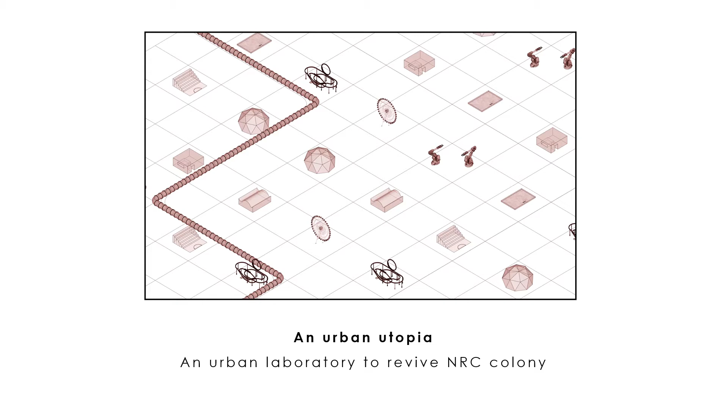The aim of my research was to explore utopian dreams that have existed in architectural movements and use it to derive a toolkit to intervene in a dystopian-like scenario.

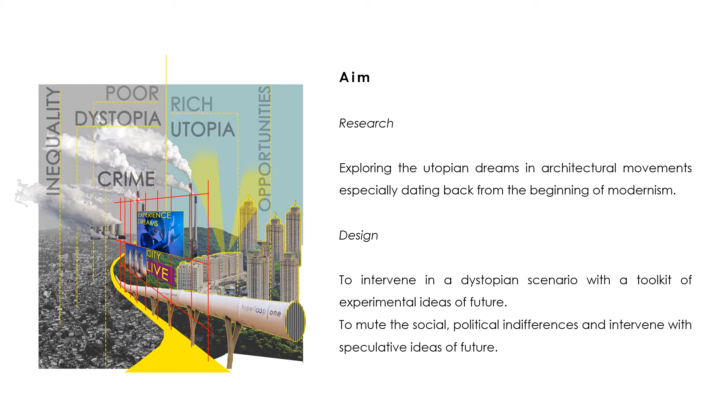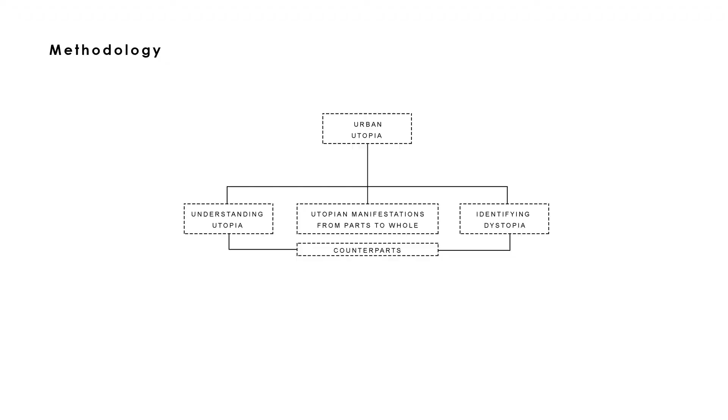The process consists of first understanding the concept of utopianism, then analyzing utopian manifestations from a part-to-whole approach, and finally understanding the counterpart of utopia, that is the concept of dystopia. By identifying experimental architecture that has redefined the way we build, and also reading narratives that speculate and shape the cities of tomorrow, I came to the following conclusions.

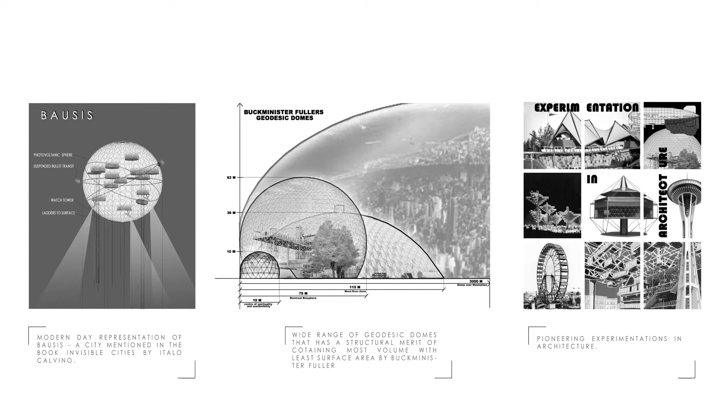Utopia cannot be used as a blueprint. Utopia cannot be achieved or designed, but it is something to be strived for. What may be utopian today may not be the same tomorrow.

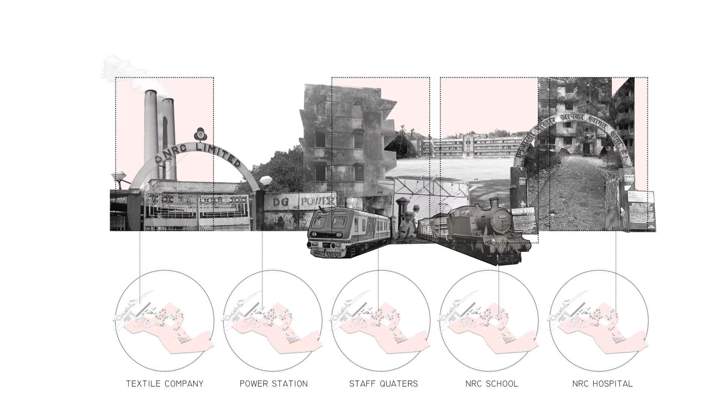To revive a city from the state of despair, it is essential to document the array of things that led to the certain disposition of the city's conditions.

The National Rayon Corporation Company, known as the NRC Company, was once a thriving township with amenities like school, hospital, clubhouse, housing and guest quarters, shopping center, recreational space, etc.

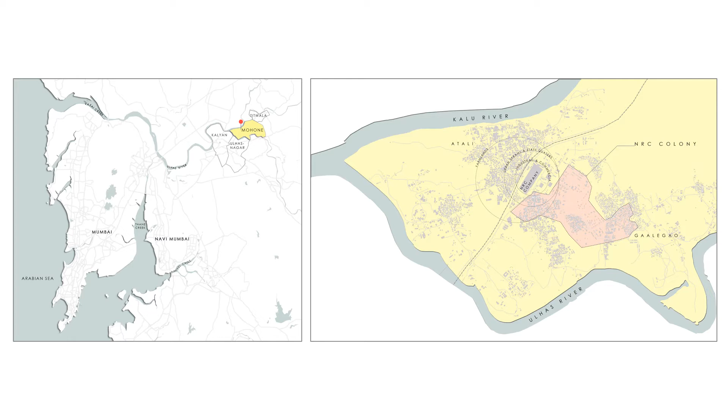A chemical and textile manufacturing unit got established in the year 1946 in the town called Mohone, also known as Ambivali, which is along the outskirts of Kalyan in Mumbai.

Such an establishment resulted in Mohone becoming a magnet for business opportunities, but due to consecutive losses faced by the NRC company, it went into a complete lockout in the year 2009.

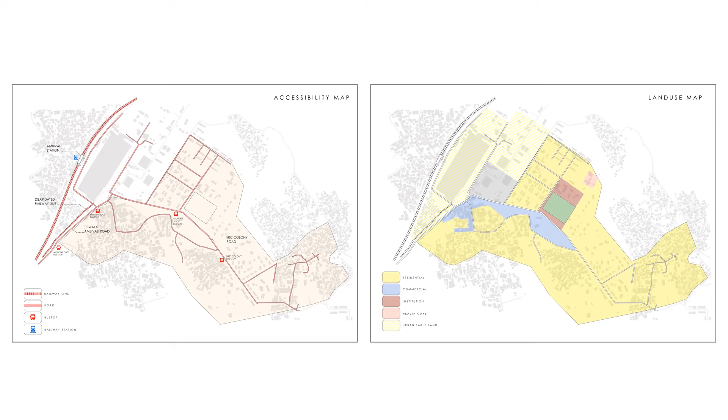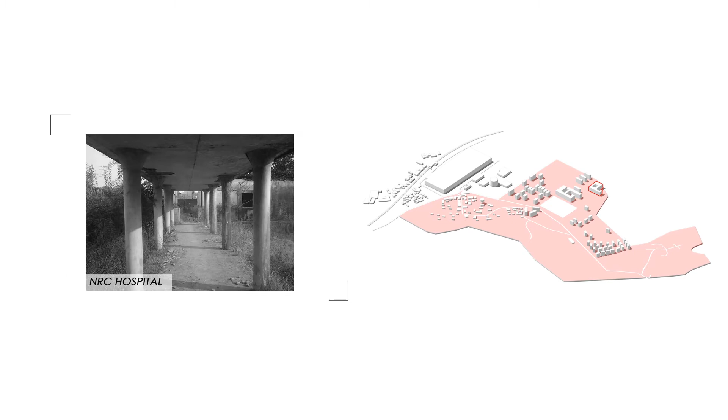Most parts of the town now consist of dilapidated or abandoned buildings. Few workers from the company still reside in such conditions because of an ongoing dispute of unpaid dues of the time they worked for the company.

For some, NRC colony is their home and they have nowhere else to go to. After a series of interviews with residents and the ex-staff members of the company, and from my personal experience, having spent most of my childhood living there, I found there is a mix of sentimental value and expectations from the colony's development, along with it having a high potential too.

I decided on taking the company land as my site for intervention as it is an already established focal point of the city.

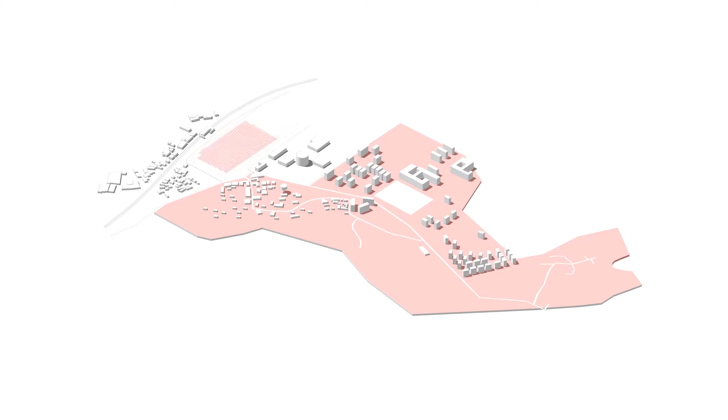The land of dispute will serve multiple sets of stakeholders. The programs include rehabilitating the company workers with improved amenities and providing income generating opportunities and community strengthening.

To initiate future development and to pull investors into this area to ultimately profit the landowners, a commercial sector is established. Also bringing the location into the public domain as an experimental center for visitors and design enthusiasts.

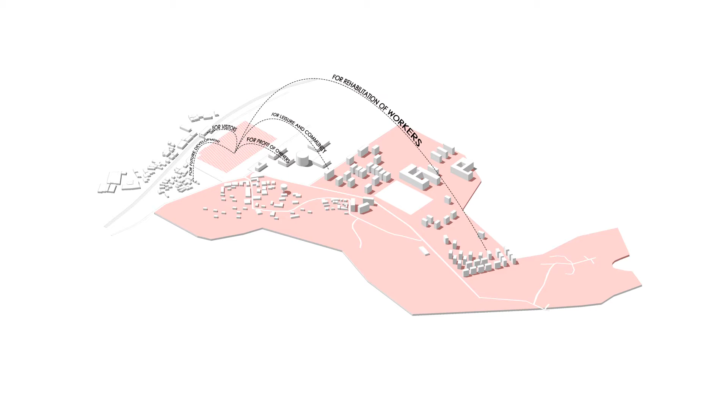What makes this intervention universal is the toolkit that can be used in similar scenarios where the host site is in a state of despair. The urban laboratory is one such prototype from this toolkit.

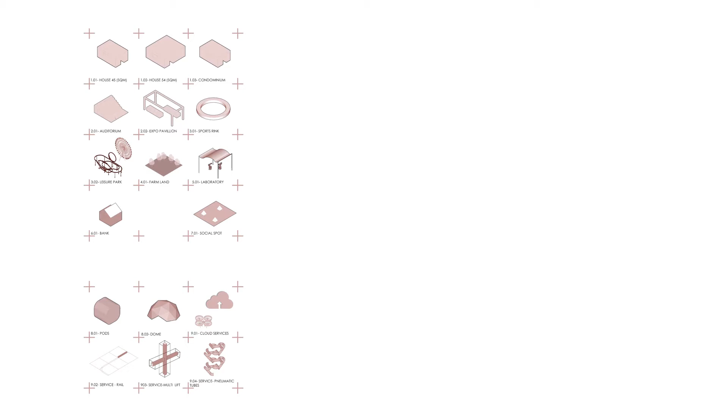The approach of this toolkit is a part-to-whole process where the programs or components from this toolkit are plugged into the city. These are flexible and prefabricated units, which are divided based on programmatic components, structural components, and services.

The design is based on architecture of plugin, where a framework is used to plug in components from the toolkit that are in the form of prefabricated units.

The urban laboratory strives to establish a designer's hub for experimentations with construction and design. One can buy, rent, invest, or pay a visit for an experience at Urban Laboratory.

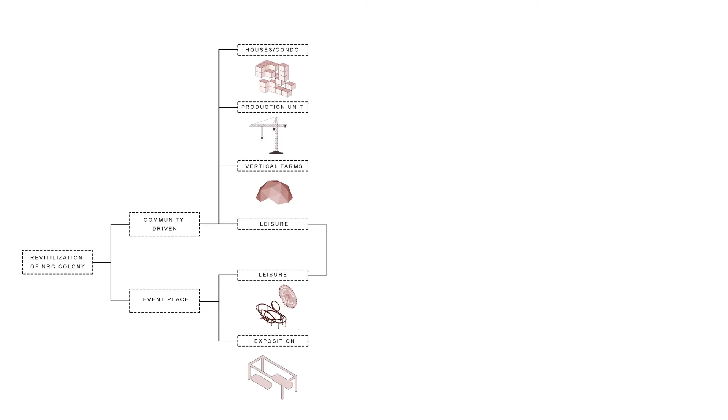It is also compatible with the Internet of Things for users also being able to interact with the virtual form of the building.

The housing units are sold as commodities to users, and these commodities will suffice the dues of the workers of NRC colony.

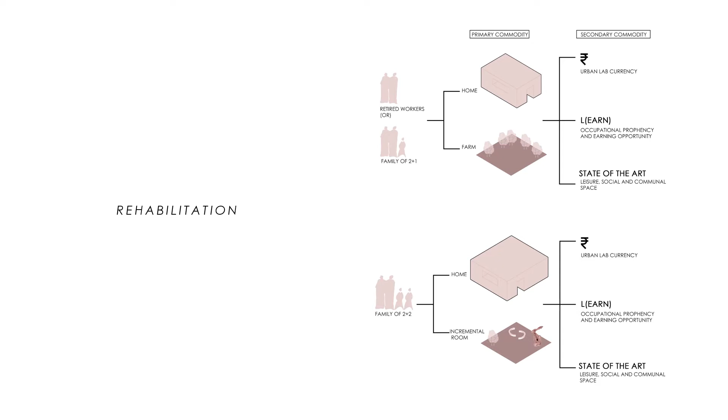For a common structural entity that can comply with various user needs efficiently, I intervened with pods that can be stacked in a designated grid of 3 meters.

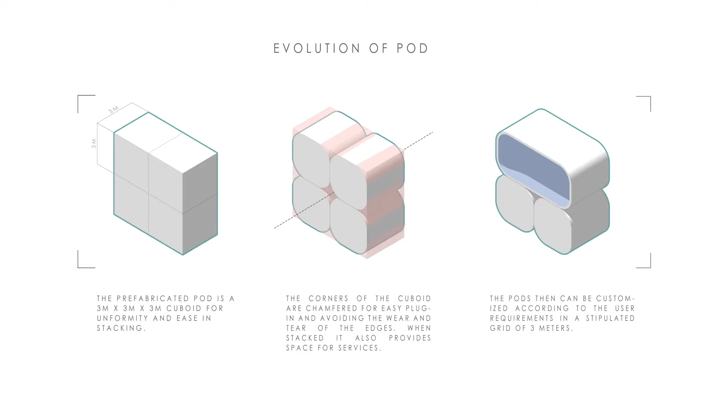The pods can be used as housing units, food outlets, as well as a kiosk.

At Urban Laboratory, living, working, growing, and leisure are redefined. It consists of condominiums, housing units, aeroponic farms, and commercial and leisure spaces.

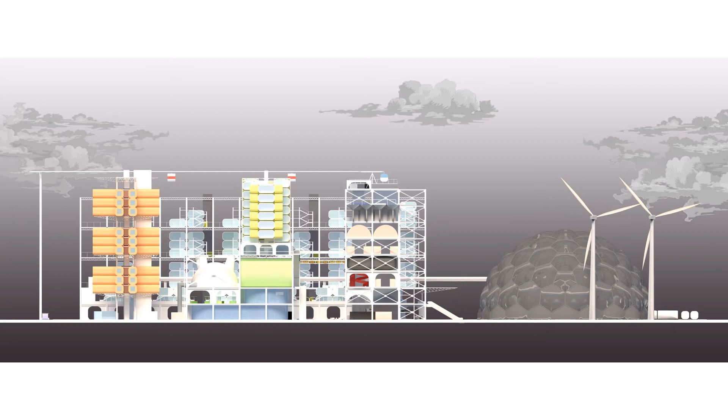One abutting road to the site comes from the existing colony, and so that portion will host private programs. The other side has Ambivli railway station and a main road next to it, so it caters to public activities.

There also exists an independent railway line to the site that was used to bring in goods to the company, which I'll be reviving and extending on the site to move prefabricated pods.

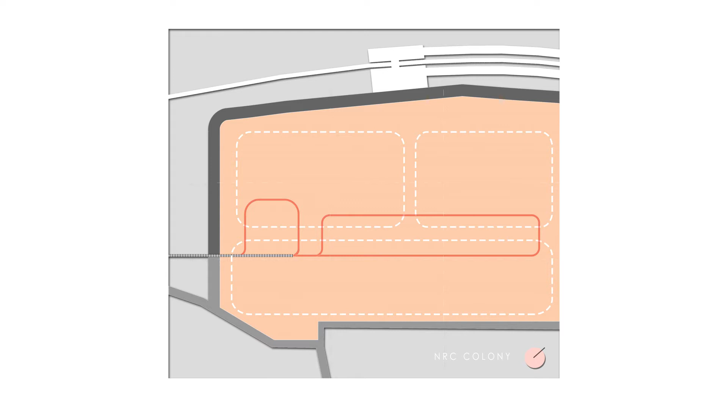A structural grid of 10 meter by 10 meter is used, which can be expanded uniformly further. A crane track is then established around the railway track.

This is the entrance to residential units, and this is for visitors. This is the service entrance. At the center is the assembly unit for pods, where conveyor belts are used to transfer the pods from different stages of construction, and finally to the other end for deployment.

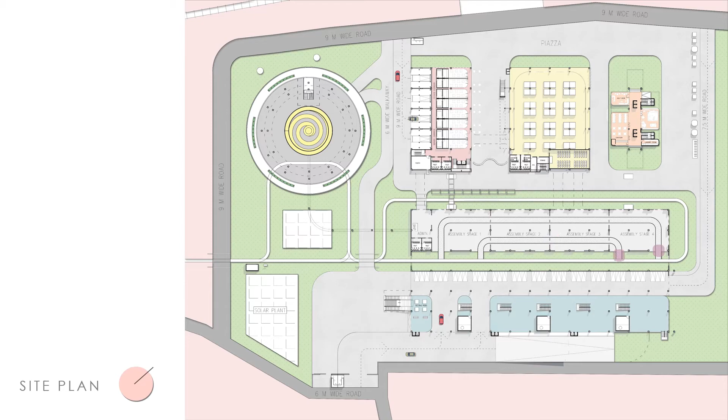Coming to the residential units, the top right side of the screen shows the components that are used from the toolkit to build the structure.

This typology consists of inbuilt aeroponic farms that are centrally connected to pneumatic pipes that transfer surplus amounts of vegetables grown in individual units to the store for sale.

Next typology is a two-bedroom house with an additional studio space for flexible use or incrementation.

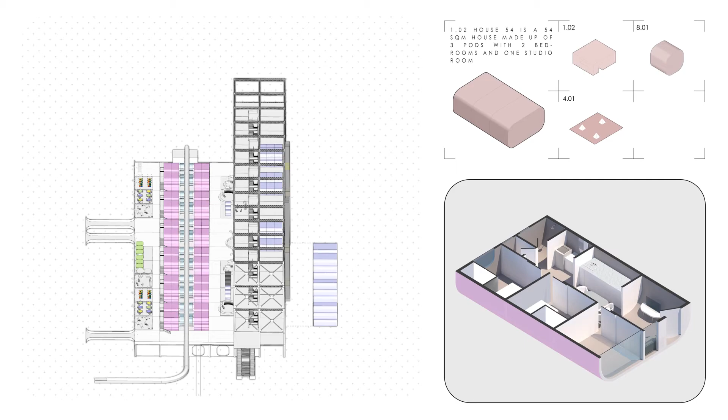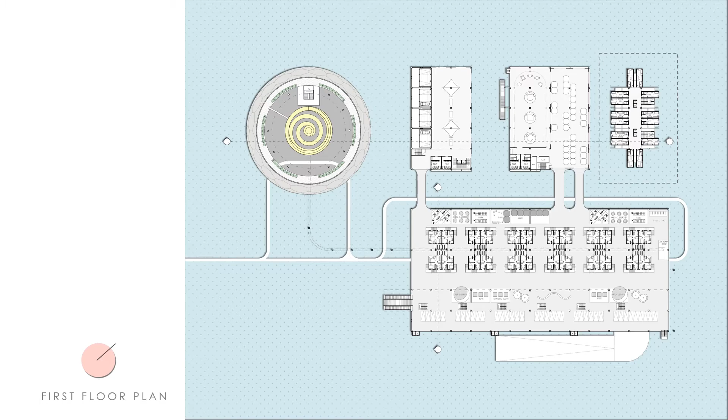Moving on to the condominium tower. It is for people wanting to reside at the Urban Laboratory on a temporary basis. These units can be customized according to individuals' or companies' needs. The tower profile allows it to be incremental based on the footfall, and the entire unit is automated and can be controlled from a single device.

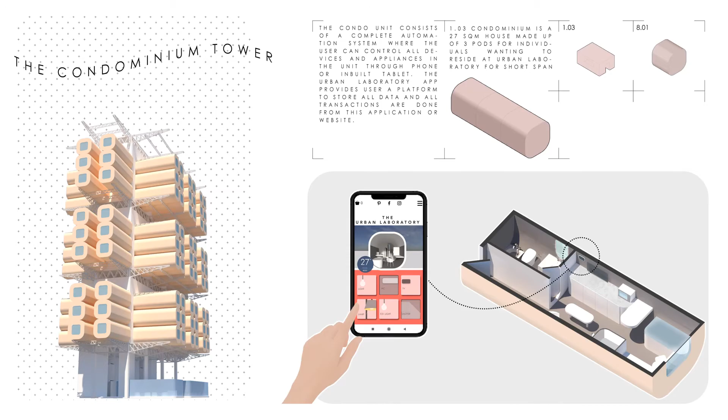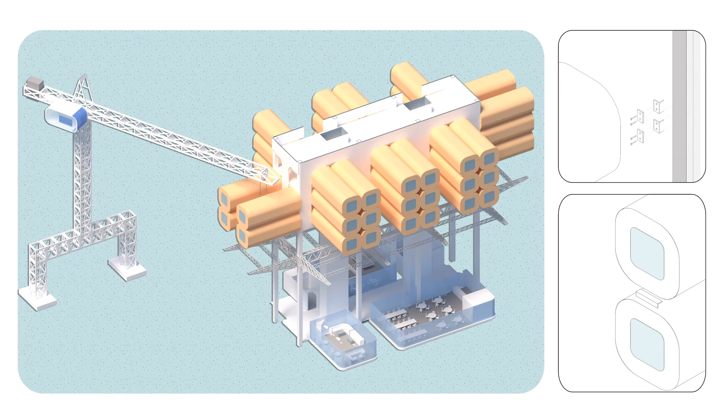Now looking at the commercial and leisure towers. The commercial tower hosts an exposition on the ground floor, with exhibition and market space on the first floor. The second floor consists of event spaces, and above that are two towers of working pods.

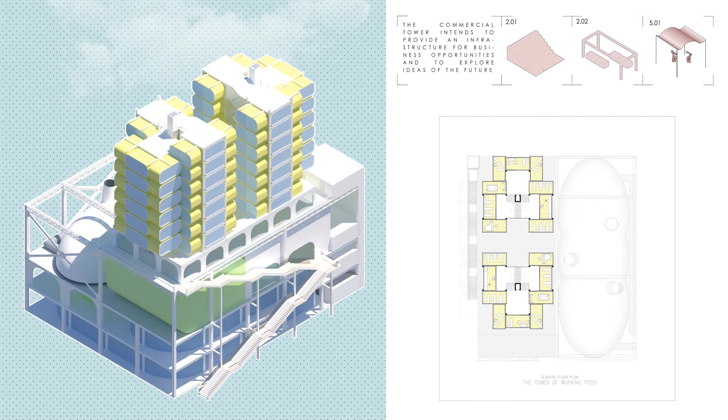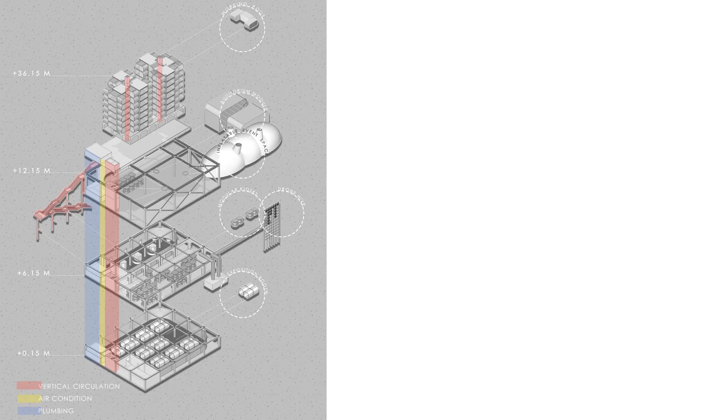This is a section through the commercial tower, and a diagram showing how different modules are plugged into the tower. The service ducts are placed on the rear side of the building and are made of prefabricated RCC panels. The floor spaces are flexible - for example, a concert space can be converted into a containment zone, and the exposition hall can be rearranged according to the type of event.

The Tower of Leisure attracts visitors with exciting rides and also provides recreational activities for the residents. The ground floor consists of a food court, and above it is a textile museum to inform people about the town's history.

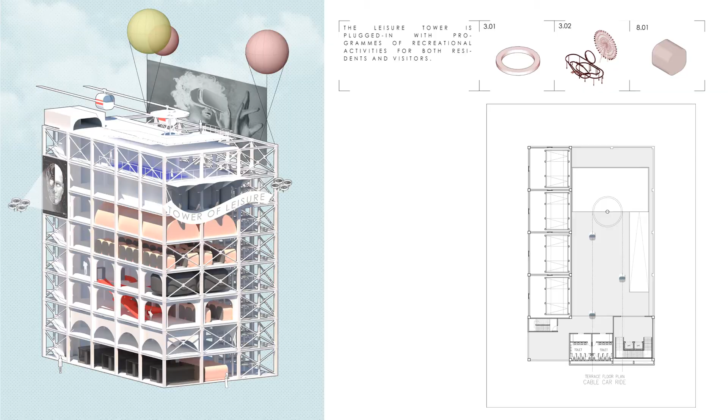Coming to the geodesic dome on the site, aeroponic farming is done here on a larger scale. There are pneumatic tubes spread across the racks to transfer vegetables into a centrally placed packing room. Airtight canisters carry vegetables on conveyor belts, finally dropping them to the processing unit.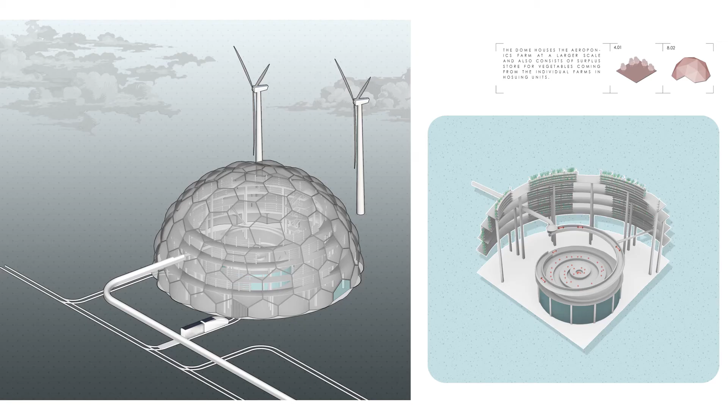Solar-powered trains enter the dome and carry vegetables to distributors, who then supply these organic vegetables to markets in the immediate vicinity. The dome skin is made up of ETFE air cushions that allow sunlight to penetrate inside, allowing crops to grow.

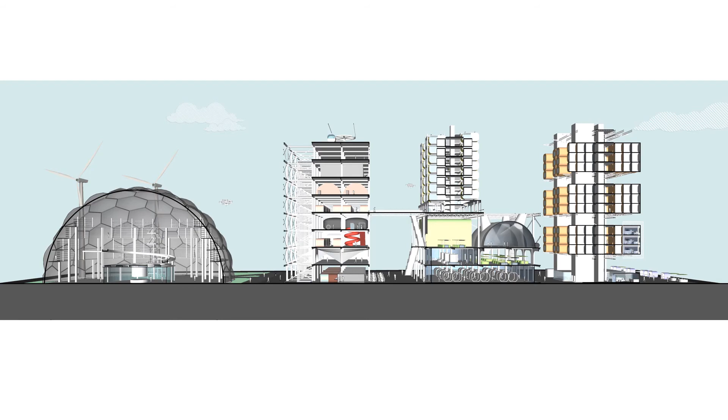This is a cross-section through all the towers, and a view of pods arriving to be placed in the tower. Here is the piazza space in the front, to perceive the tower's surface, billboards and LED screens that are attached to it.

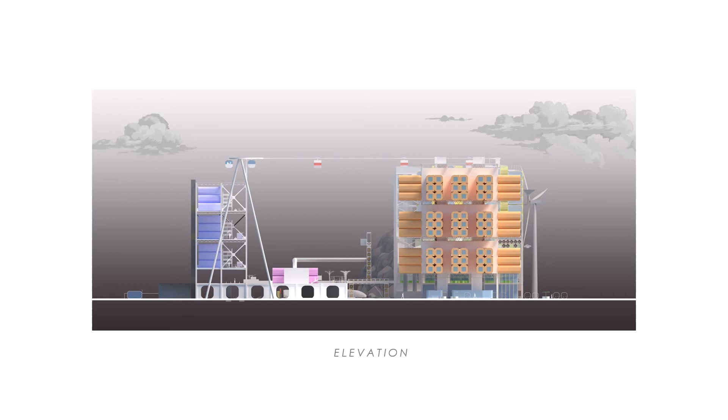An elevation showing the composition of pods in the main structural framework. Following are some of the illustrated views of the design.

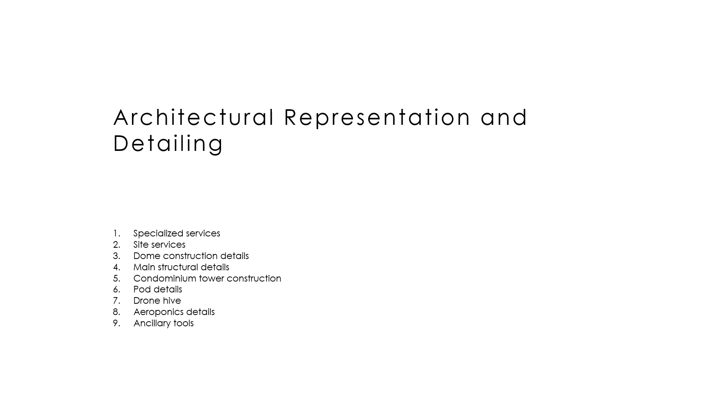In ARD, I have looked at specialized services like solar-powered railway and pneumatic systems, site service layouts, dome and condominium construction details, steel construction joinery details, pods, drones and aeroponic details.

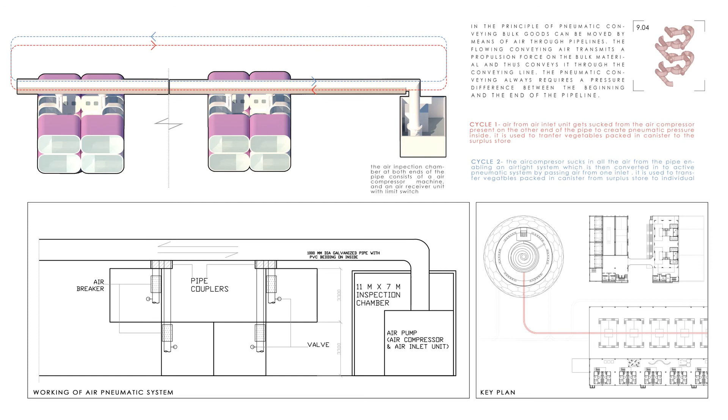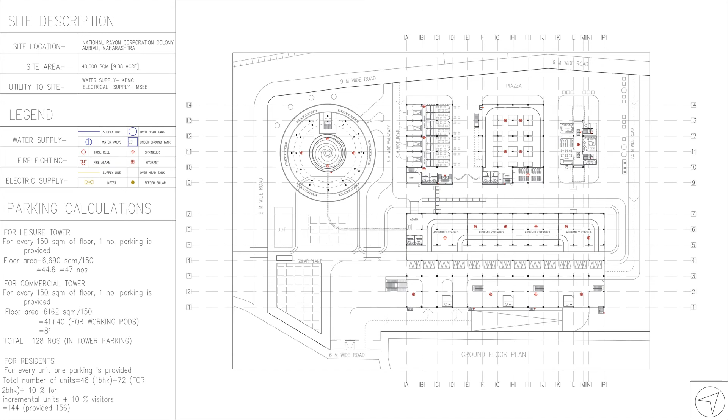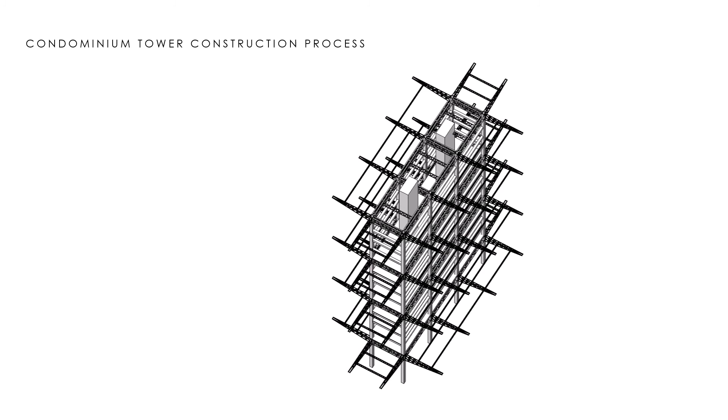An animation showing the construction process of the condominium tower: main tapered truss beams are placed, then the core of the lift is constructed, floor beams are placed, then the slabs, the staircases and external walls are constructed, and finally the pods are placed.

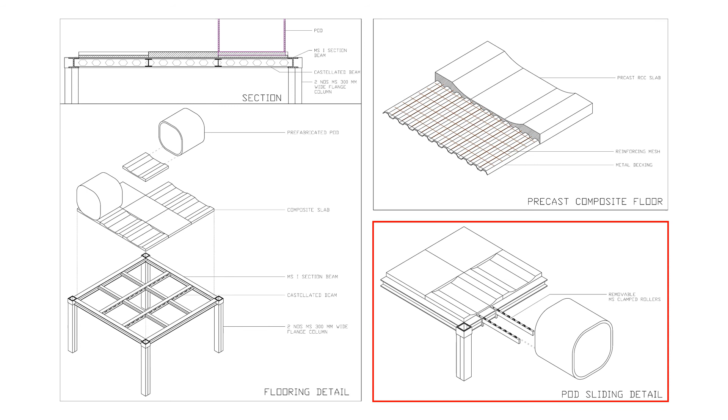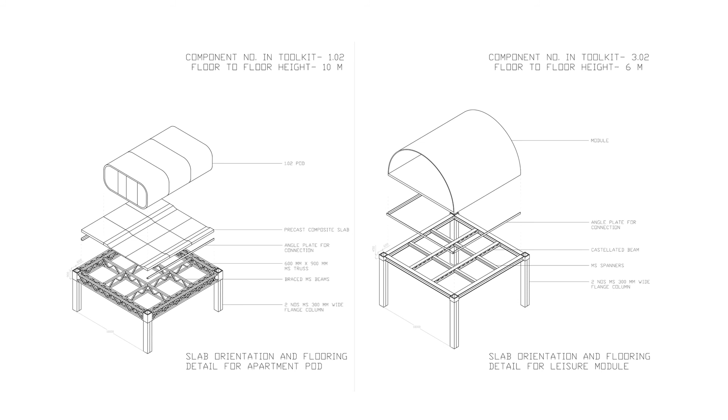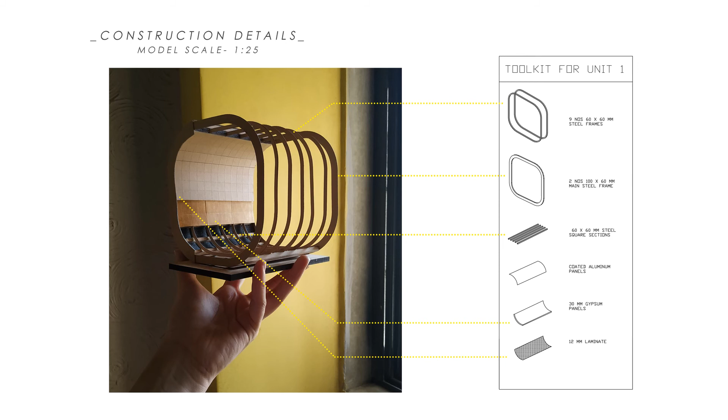A 1:25 scale model showing different construction materials of a pod, and an animation showing the construction process of pods.

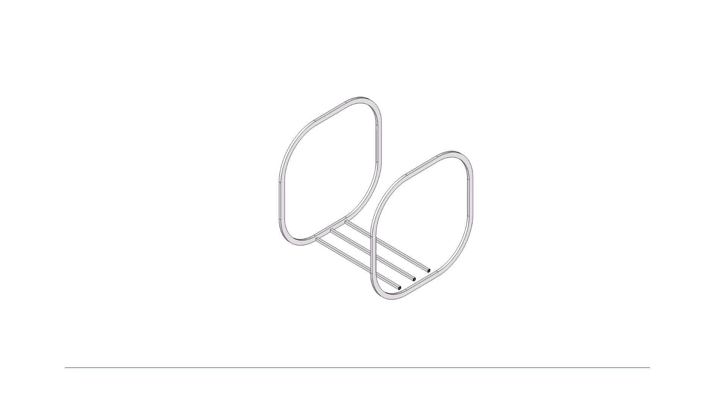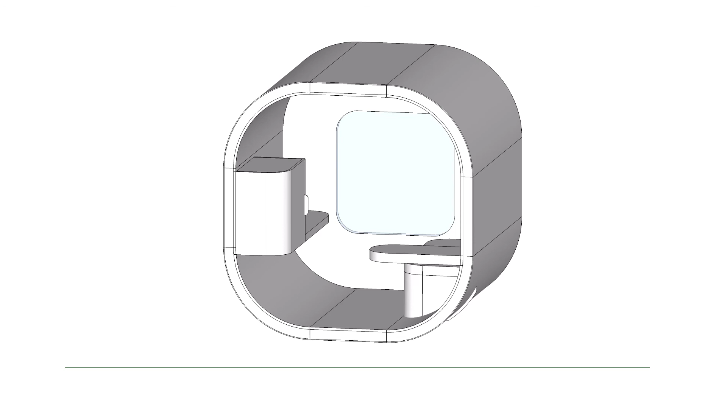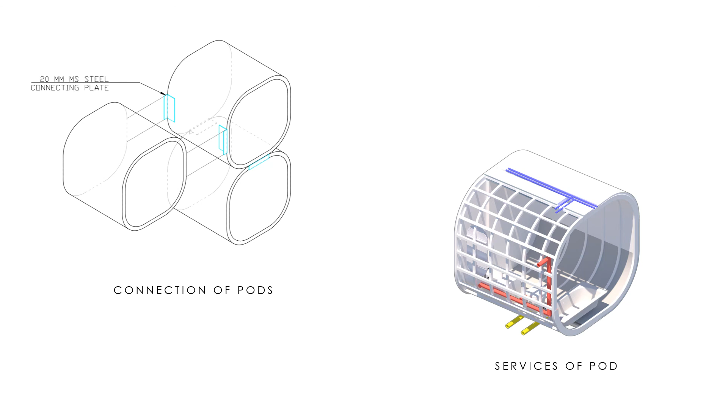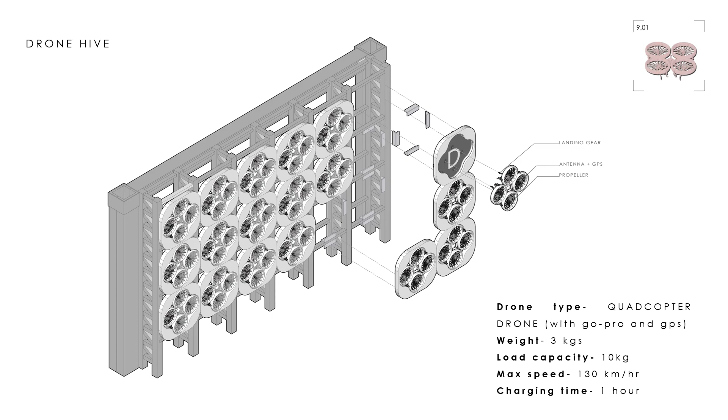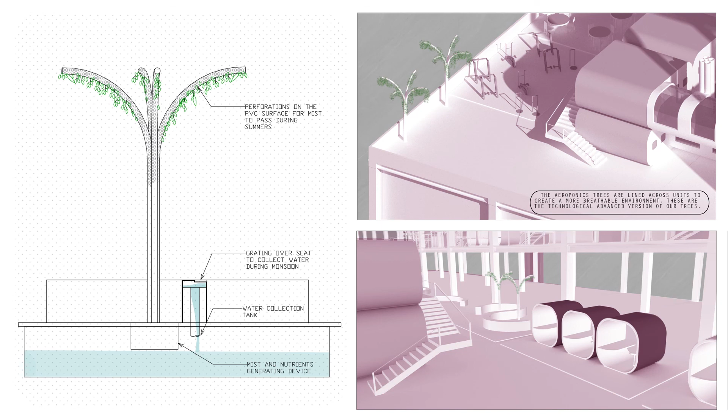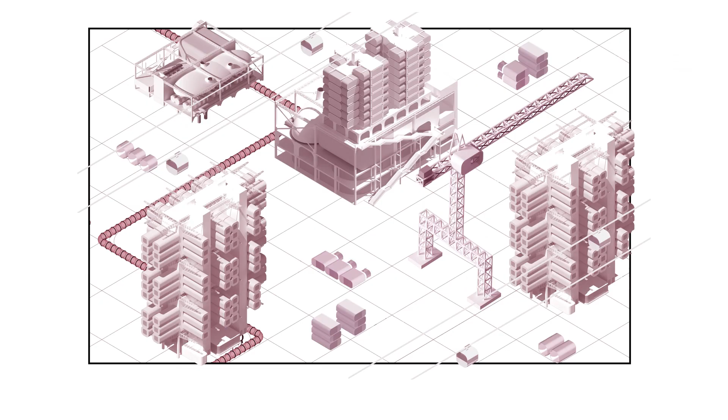Concluding on a note that an architecture which indulges people in its experimentations and strives to keep expanding flexibly will make an ideal urban utopia. Thank you.